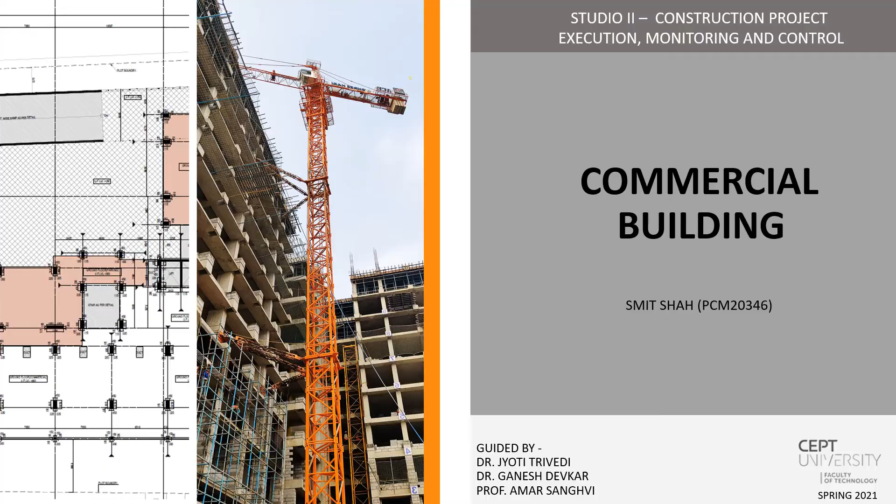Myself, Smit Shah, would be presenting a glimpse of our work, which we did as a part of our Studio 2 project. The project was of a commercial building which is located in Shyamal, Ahmedabad. It covers an area of 5,360 square meter. The office is on the TPS road.

6 elevators and 3 staircase blocks connect the floors of the building. The ground plus 2 floors are exclusively reserved for retail. It has 3 basements and is a G plus 14 floor structure. Our scope of work for this studio is from 11th floor to 14th floor. The contract for the project was of labor contract.

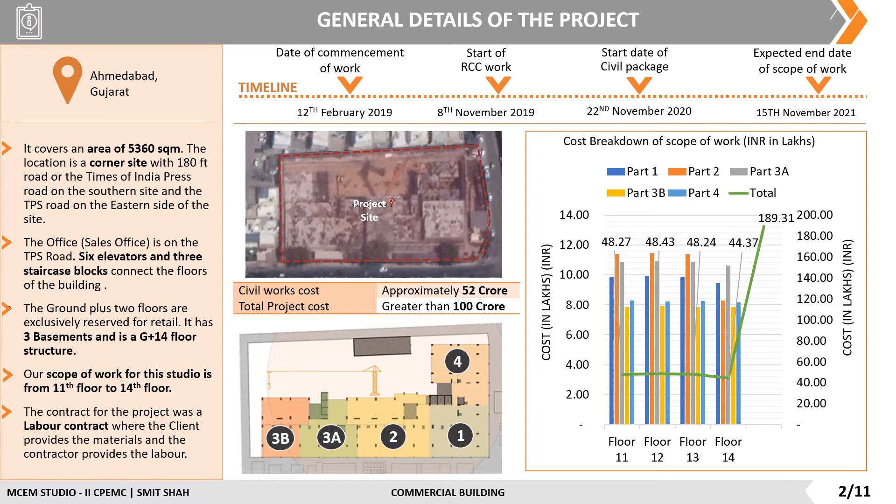The date of commencement of work was 12th February 2019 and expected end date of scope of work is 15 November 2021. The diaphragm wall construction initiated in March 2019, which marked the beginning of project. The dewatering and construction of the diaphragm wall was completed in 1 month. The method used for dewatering was open sump pumping method.

The diaphragm wall is constructed up to the height of 3 basements. A total of 55 panels were cast for the entire diaphragm wall. The size of panel was 20 by 0.5 by 5 meters. Here we have calculated productivity for excavation, reinforcement and concreting. The excavation was done using Kelly grab equipment and the productivity came out to be 10 meter cube per hour. The reinforcement productivity was 87.5 kg per man hour and the productivity for concrete was 2.5 meter cube per man hour.

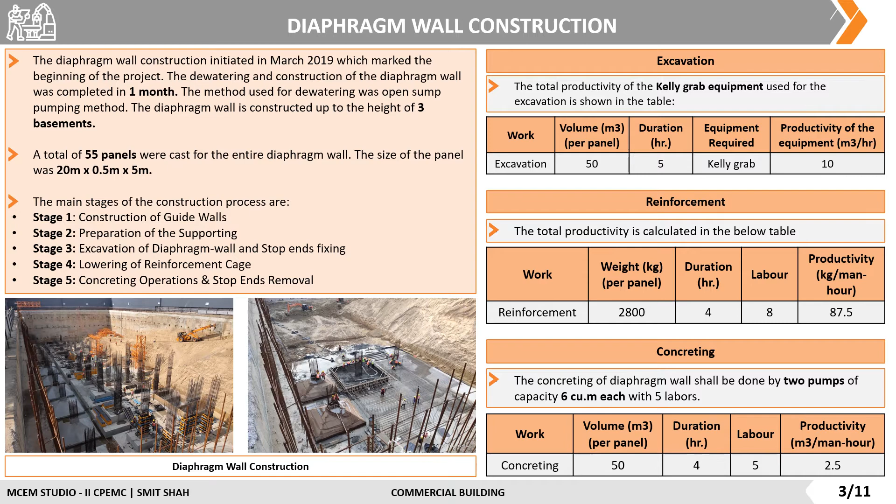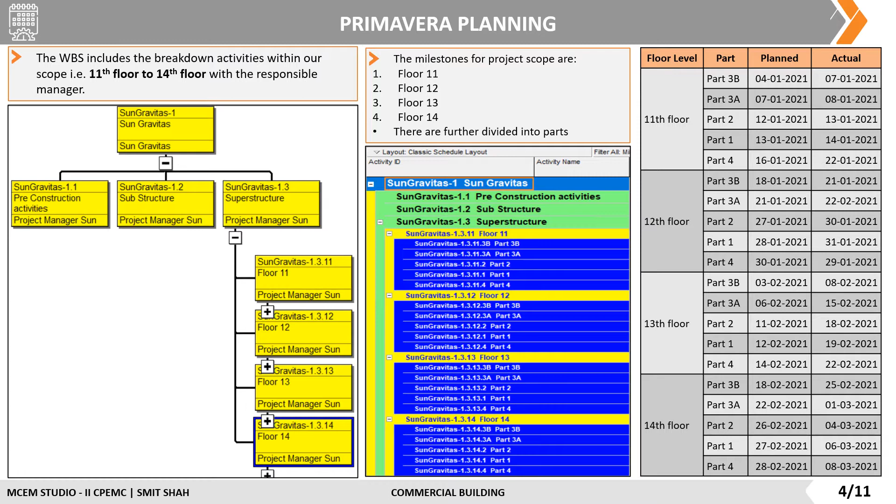The planning and scheduling of our project scope was prepared in Primavera. The work breakdown structure is shown here, which includes the activities of 11th floor to 14th floor. Milestone schedule was prepared of each floor and it was further divided into parts. Then planned and actual dates for each part of each floor is shown here.

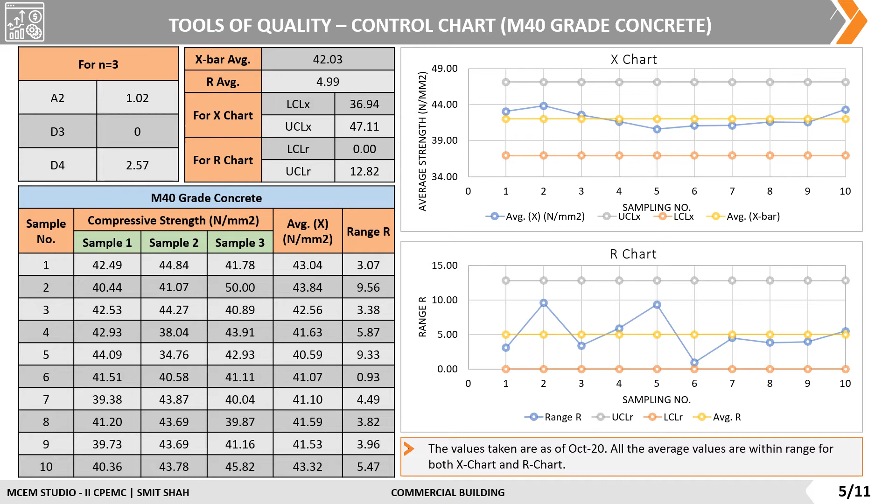For tools of quality, the first tool that was used was control chart. Here we have prepared a control chart for M40 grade concrete. As from the X chart and the R chart, it can be seen that all the values for M40 grade concrete are within range. The second tool for tools of quality was considered as Ishikawa diagram or cause and effect diagram. The issue considered for this was concrete leakage in underground tank.

After studying the diagram, it was postulated that the major cause of this non-conformity was the error in calculation of supports required. This resulted in an insufficient number of ledgers and inadequate support. Also, improper tightening of clamps and excessive load during concreting contributed to the problem. Due to inadequate monitoring and poor communication between the labor and engineer, this non-conformity could not be avoided.

The possible suggestions include preparing a checklist to be followed by a supervisor. The inclusion of PMC to represent the client helps in increasing the quality control. And a formal system of identifying and recording non-conformance might also help reduce the negligence on the site.

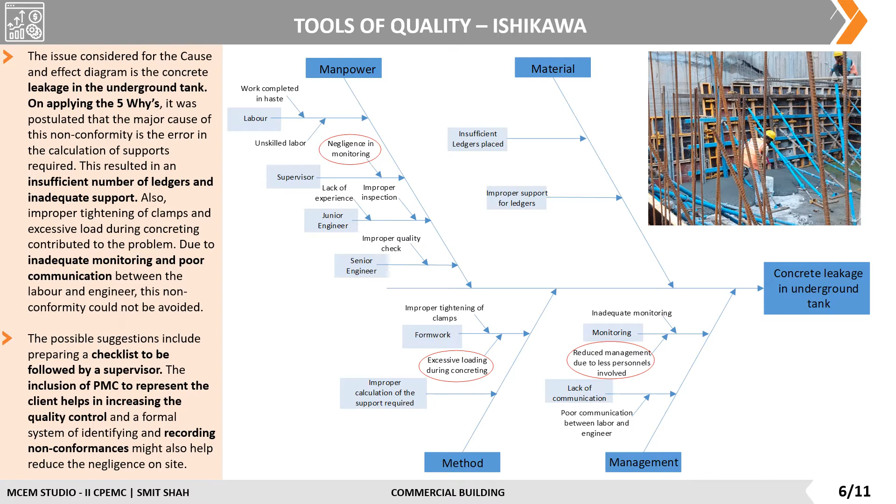For job hazard analysis, different situations were observed, one of which was worker caught in between moving vehicle. Here in the figure, it can be seen that labor is standing behind the RMC truck. Worker might get caught between the moving RMC truck and get injured. So we have suggested some controls which include engineering control, administrative control and personal protective equipment control as given in OSHA. In engineering control, barricading flag lines could be placed to mark the path of the mixer. Warning signboards could be installed while RMC is unloaded.

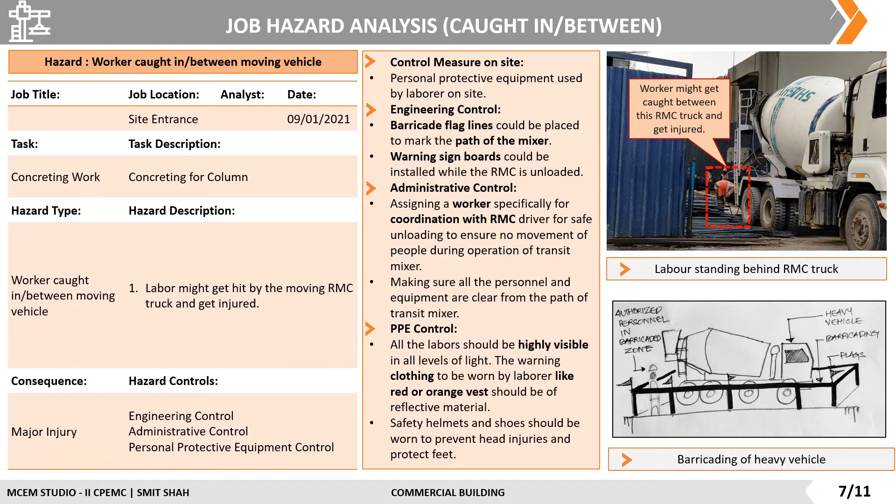In administrative control, assigning a worker specifically for coordination with RMC driver for safe unloading to ensure no movement of people during operation of transit mixer, making sure all the personnel and equipment are clear from the path of the transit mixer. In PPE control, all the labor should be highly visible in all levels of light. The warning clothing to be worn by the laborer like red or orange vest should be a reflective material. Safety helmets and shoes should be worn to prevent head injuries and protect feet.

For set in order, we have suggested are walkways and work areas clearly defined and unobstructed, are the jackets, gloves, etc. given to the labor stored properly after the day's work or not. For shine, we have given are labels, signs and boards clean and unbroken, is the particular area cleaned after construction activities are over, and likewise. The another tool used in lean management was just in time.

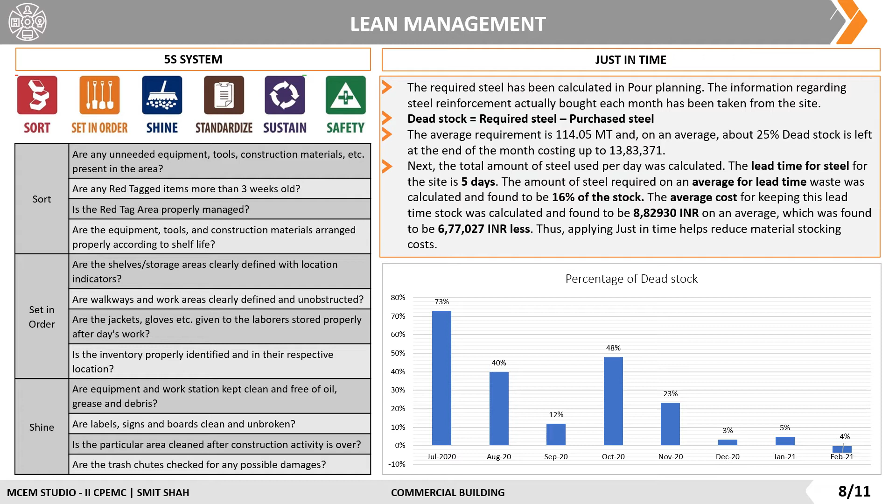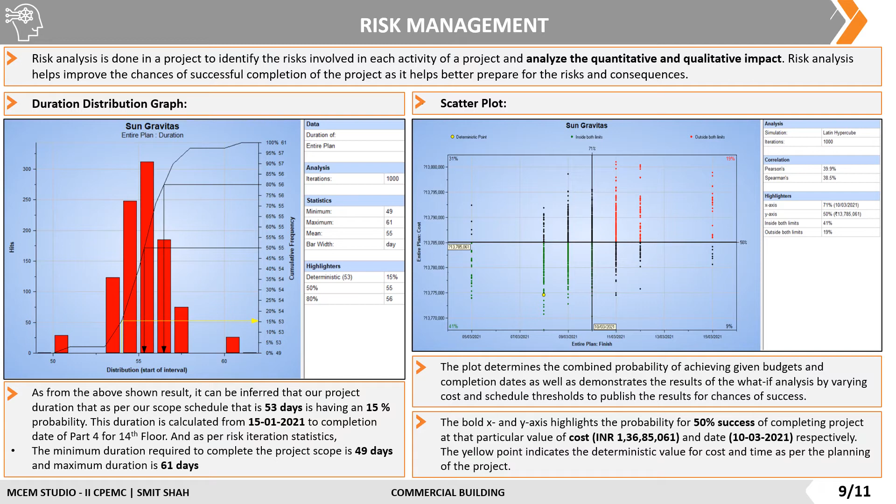Next, scatter plot was plotted. The plot determines the combined probability of achieving given budgets and completion dates, as well as demonstrates the results of what-if analysis by varying cost and schedule thresholds to publish the result of chances of success. The yellow point in the graph indicates the deterministic value of cost and time as per the planning of the project. The mitigation risk register was prepared accordingly after consultation with the site personnel.

The deterministic time obtained from Primavera using CPM method was 53 days. According to PERT analysis, the possibility of that happening is 15%. The minimum time required is 49 days and maximum time is 61 days. After risk analysis, it was observed that the probability of deviation in cost is less than 2% and latest finishing date wouldn't vary more than 12 days.

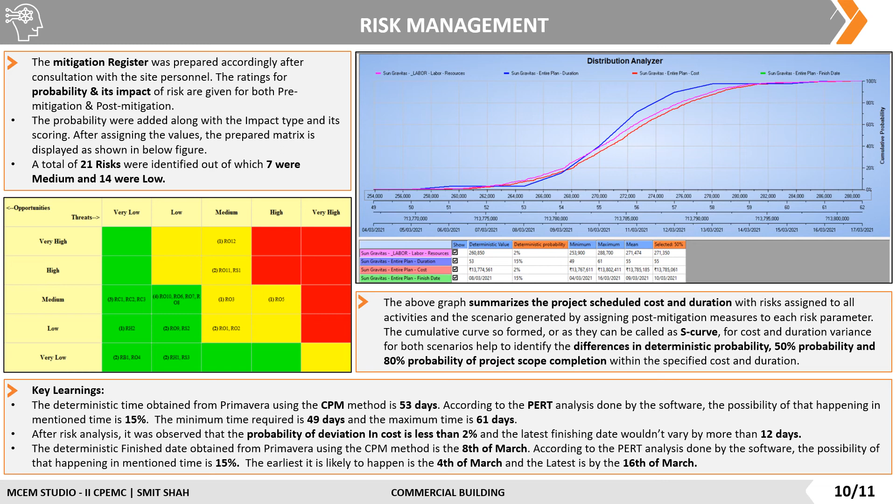The deterministic finish date obtained from Primavera using the CPM method is 8th March. According to PERT analysis, the possibility of that happening is 15%. The earliest likely to happen is 4th March and latest is 16th March. Here is a summary of the above deliverables which were explained earlier.

The diaphragm wall construction: this exercise helped us in knowing in detail about various activities involved in diaphragm wall construction, including the problems faced during construction. The schedule of the project was prepared in Primavera, including the milestone dates, 4-week look ahead schedule, and work breakdown structure of the project. The tools of quality control and assurance play an important role in project and ensure good quality. Proper standards should be set and quality manual should be followed on site.

Ishikawa diagram is used to identify major cause of the problem. Here it was postulated that the major cause of this non-conformity is the error in calculation of supports required. The job hazard analysis emphasizes the need and importance of safety on site. The potential hazards observed on site were reported and relevant hazard controls were given.

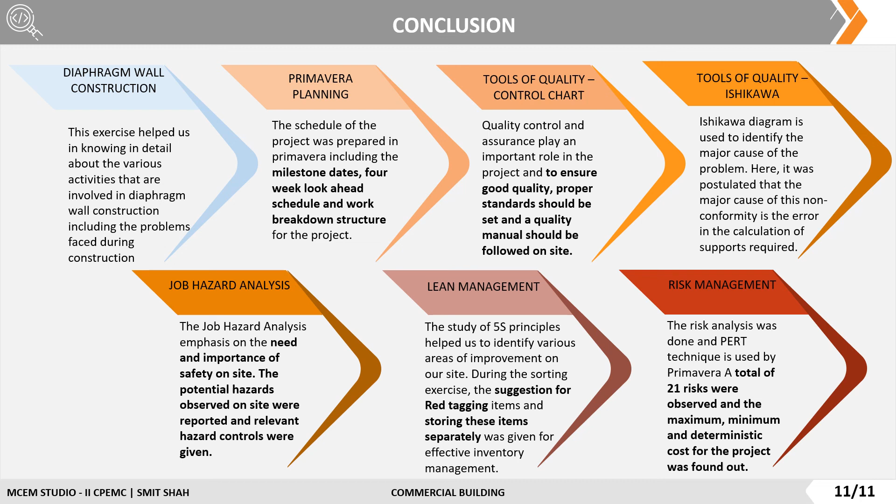The study of 5S principles helped us to identify various areas of improvement on our site. During the sorting exercise, the suggestions for red tagging items and storing these items separately were given for effective inventory management. The risk analysis was done and PERT technique is used by Primavera. A total of 21 risks were observed and the maximum, minimum and deterministic cost for the project was found out.